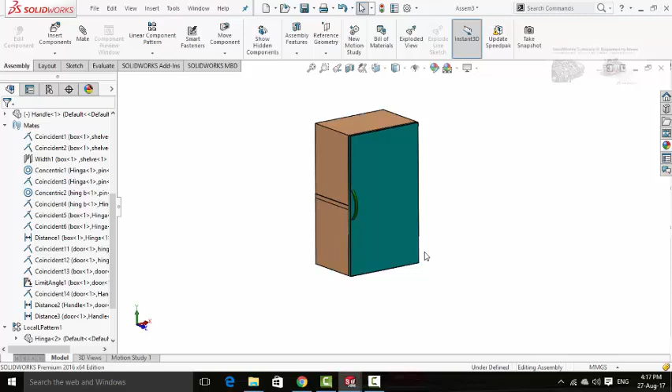Assalamualaikum friends, in this video I am going to show you how to create a box like this in SolidWorks by using sheet metal commands. So keep watching this video till end.

So let's start. Draw a sketch on front plane. Now select corner rectangle and start it from the origin. Define it 1 meter and 600 millimeters.

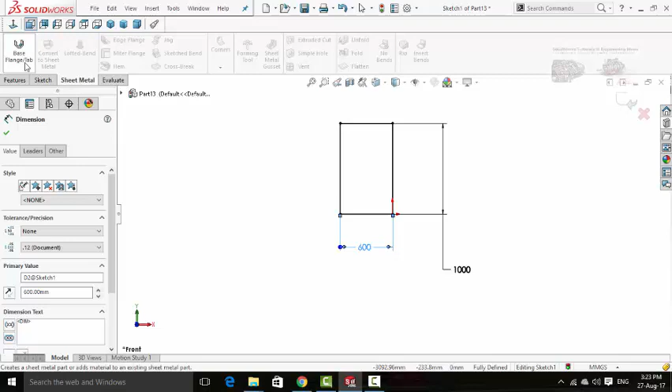Now in the sheet metal tab, select base flange command and extrude it up to 0.4 millimeters and keep the rest of the things as they are. Press OK button.

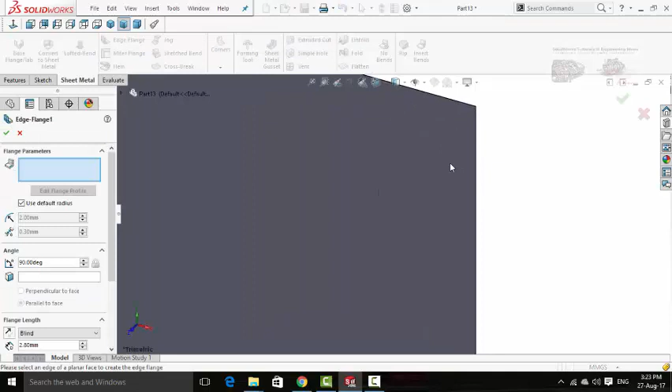Now click on edge flange command and select all these lines one by one, and carefully select the line on back side of the part. Extrude it on this direction.

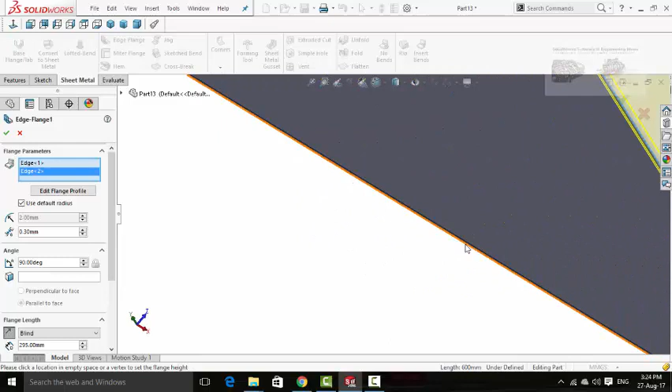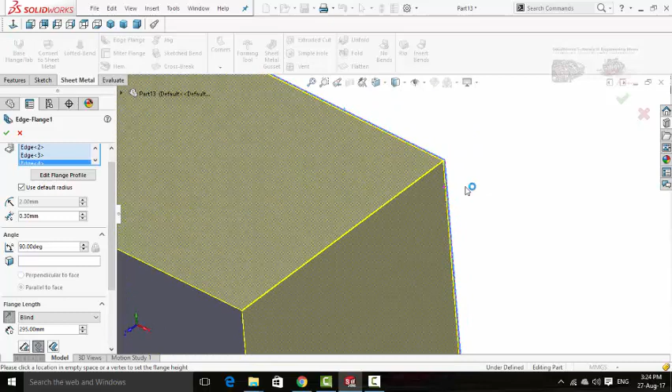Now scroll down from here. If you zoom in and see this distance which is mentioned here, this is the bend radius, here is the bent degree, and here is the extrusion distance, and we need to keep this extrusion distance 295 millimeters. So press OK button.

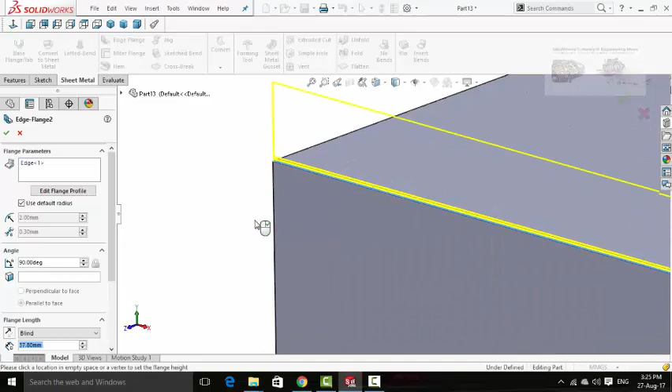Again select edge flange command. For this time we need to select these edges one by one. And extrude them on this direction.

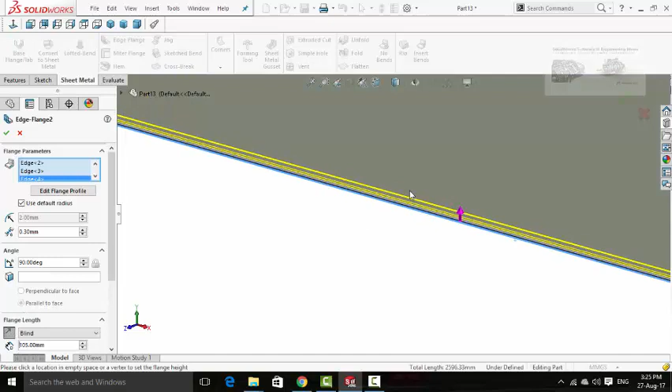30 millimeters is the distance, and press OK button. Now box is ready, so save it.

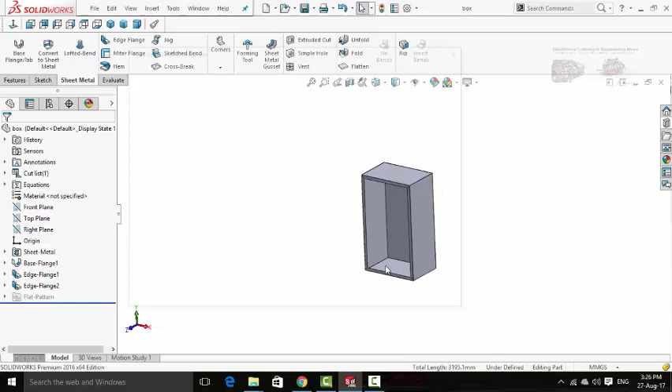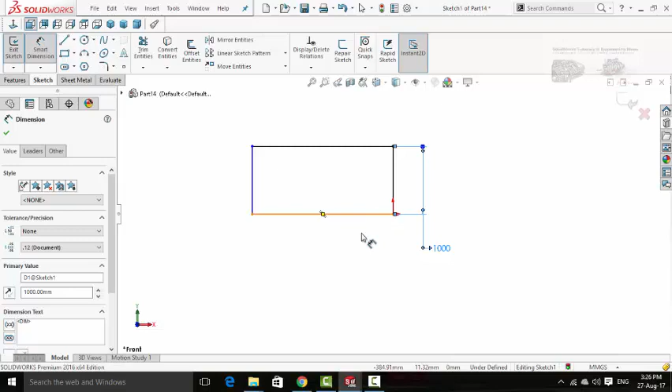Now create a door. So go to new part and sketch on front plane. Select corner rectangle and draw it from origin. Define it 1 meter and 600 millimeters.

Select base flange tab from sheet metal tab and press OK button.

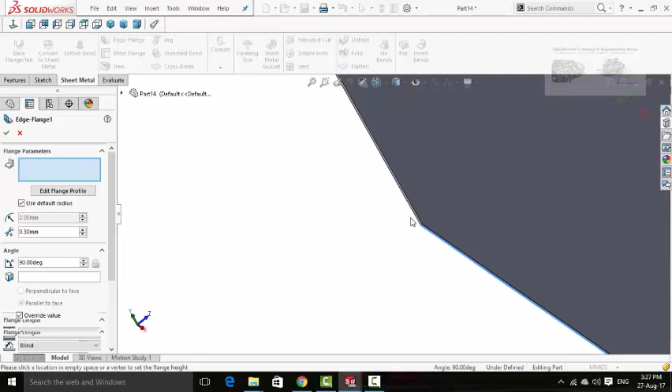Now use edge flange. Select all the corner lines one by one. Scroll down and extrusion distance should be 20 millimeters. Press OK button.

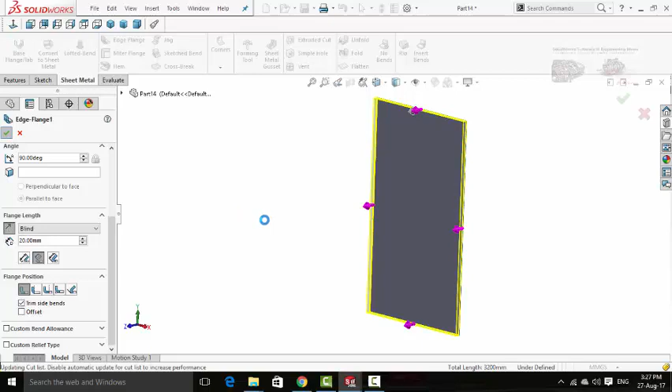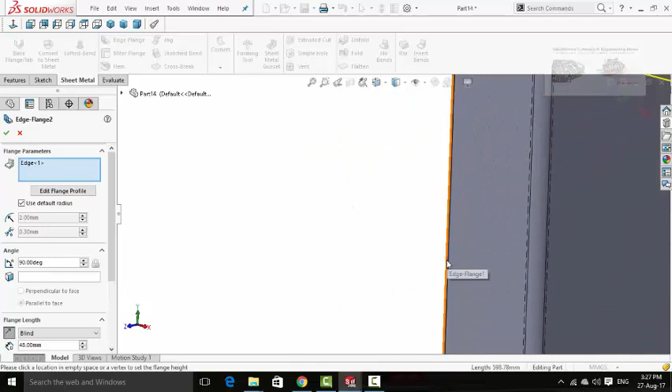Now once again select edge flange and select all these corner lines one by one again, on this direction. Scroll down and type the extrusion distance or length 30 mm. Press OK button.

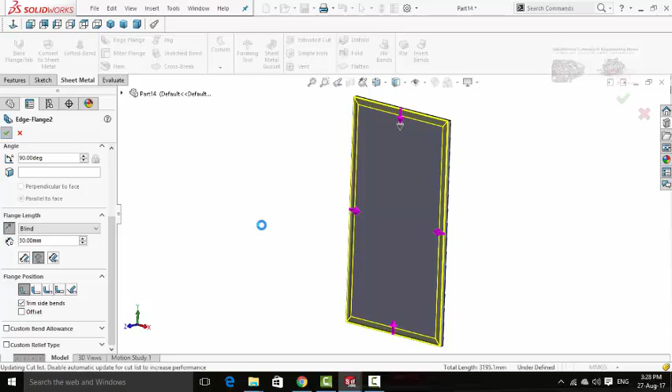Now door is ready, so save it. Door.

Now create a shelf. So for that, create new part. Sketch on front plane and draw a corner rectangle from origin. Define it 599.20 and 399.60.

Now again in the sheet metal, select base flange tab and press OK button.

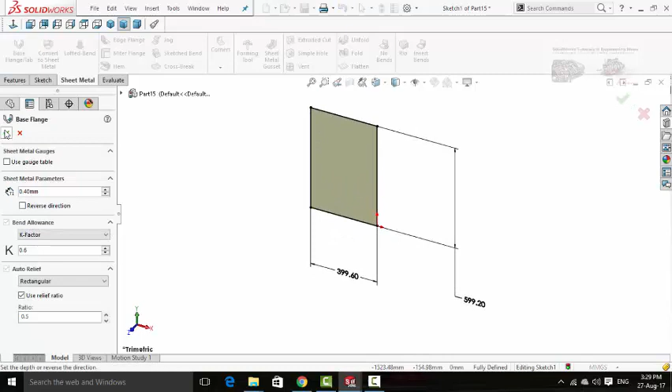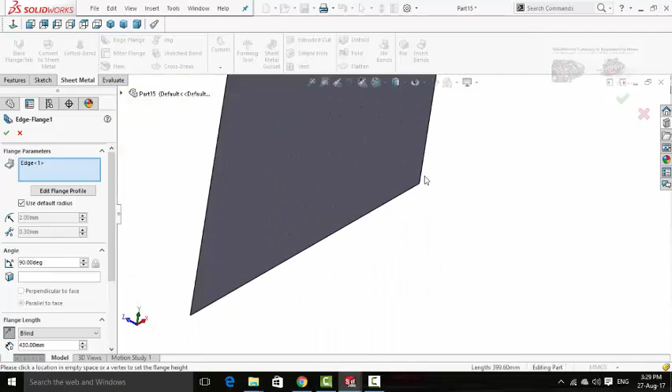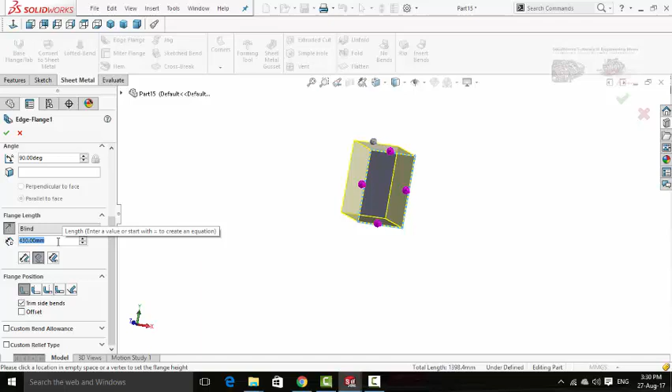Now select edge flange. And extrude it up to 30 mm. Press OK button.

Now you can save it.

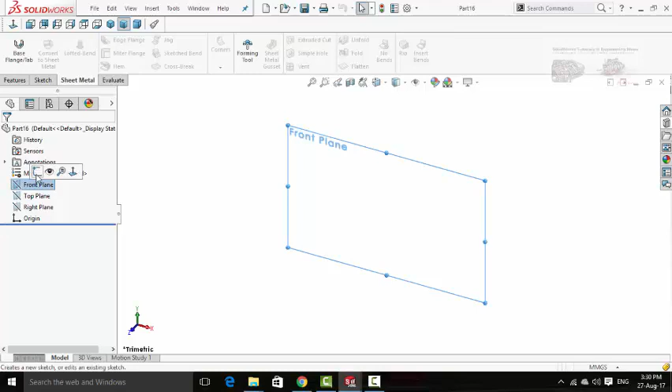Now another new part for hinge. Sketch on front plane and draw a rectangle from origin. Define it 30 mm and 70 mm. In the features tab, select Extruded Boss base command and extrude it up to 2 mm. Press OK button.

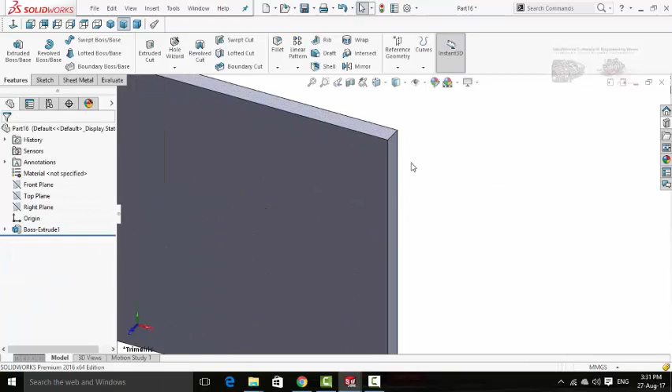Now sketch on this face. Make normal to by pressing Ctrl+8 key and select the perimeter circle. Draw it from this corner. Now select this point from here and draw or place it on this quadrant of the circle.

Press escape button and then press and hold Ctrl key. Select this corner and then this point. Make relation vertical. Now define it

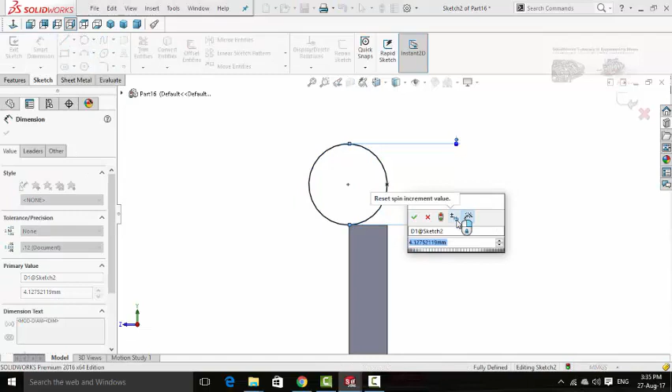3 mm. Now draw a circle inside this circle and define it 1.5 mm.

Zoom in and draw a line. Start it from this corner to this line.

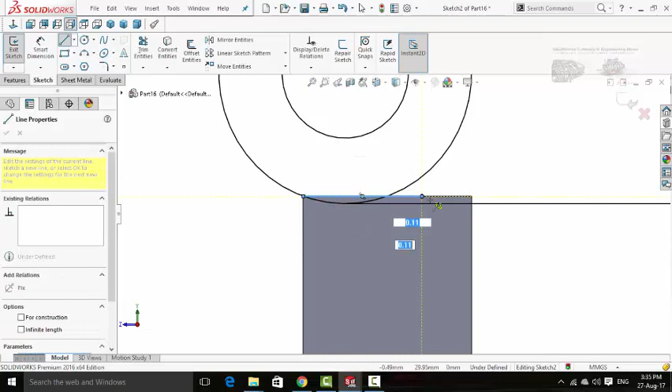Now select trim entities command and trim the two lines and circle. Now define this length for the line, which is 1 mm, so press OK button.

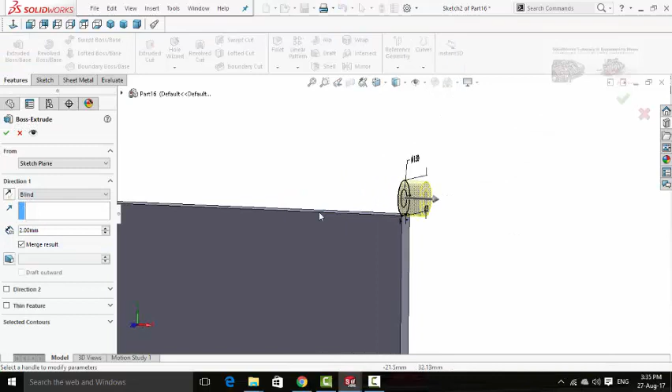In the features tab, select Extruded Boss command and extrude it up to 10 mm on reverse direction. Press OK button.

Now select this Boss Extrude 2 and click on linear pattern. First of all, it will ask you about the direction 1, so select this line as first direction.

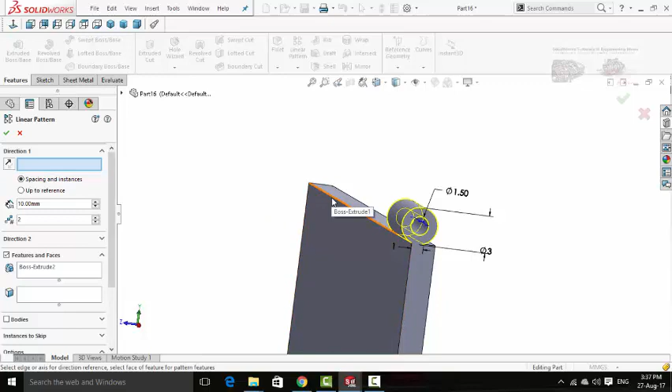Then it will ask you about the distance between the instances, which is 30 mm on the reverse direction, and the quantity is 3. Press OK button.

So it was the first part of hinge. Now create another new part for the second part of hinge. But before that you have to save this hinge part 1. So save it, hinge A.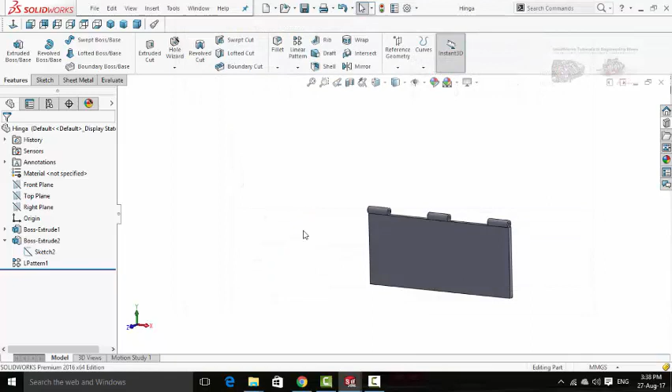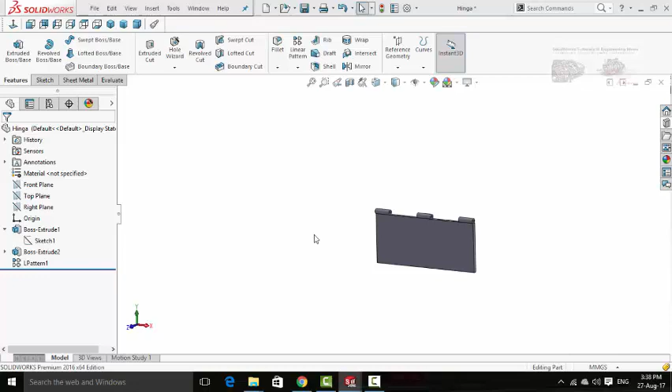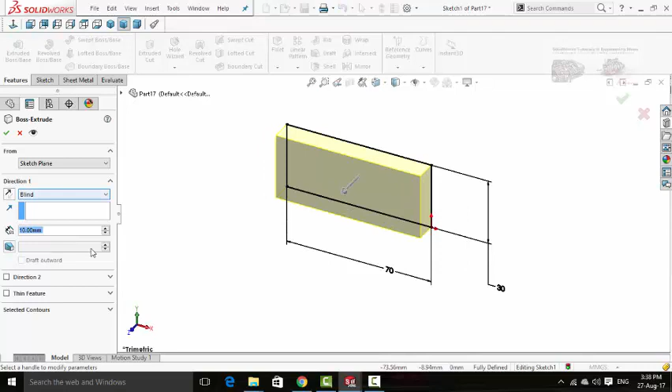Now click on this arrow and select the sketch, then edit it, select all the sketch and copy it. Now create a new part. So on the front plane create a sketch. Now paste that sketch of hinge A, select this corner and then the origin, make relation coincident. Now it is fully defined, so extrude it up to 2 millimeters. Press OK button.

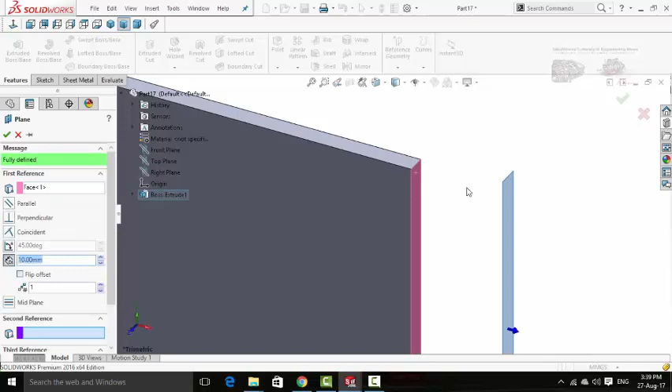Now click on reference geometry and select plane. Select this face as first reference and flip offset. The distance is 10 millimeters.

Press OK button. Now open the hinge part A. This time I want to copy the sketch for this part. For that, click on this arrow and click on the sketch, then edit it, select all the sketch and copy it. Save and exit from sketch.

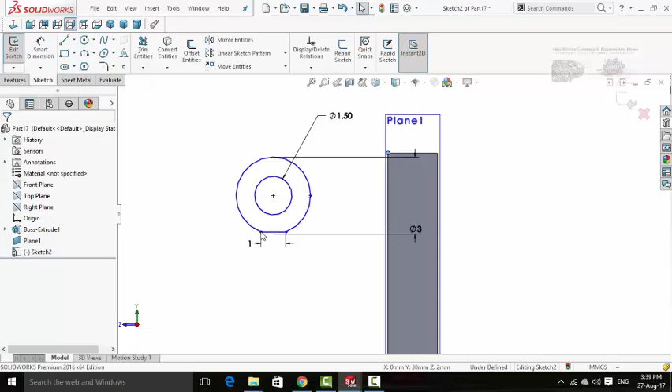Open the hinge part B and sketch on this new plane. Make normal to and paste the sketch. Now select this point and the corner and make relation coincident. Another step is to select this line and then this line, make relation collinear. Now our sketch is fully defined.

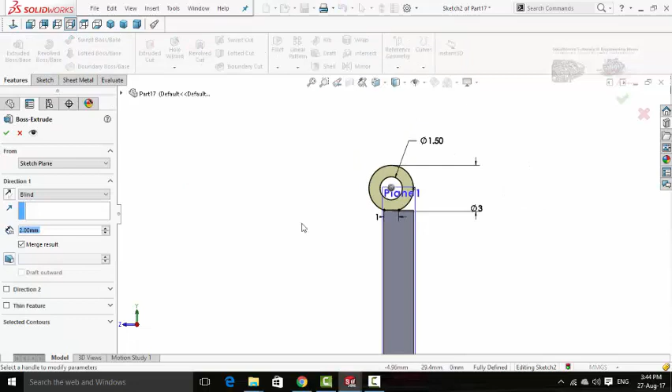So in the features tab, select Extruded Boss base command and extrude it up to 2 millimeters and on the reverse direction. Press OK button.

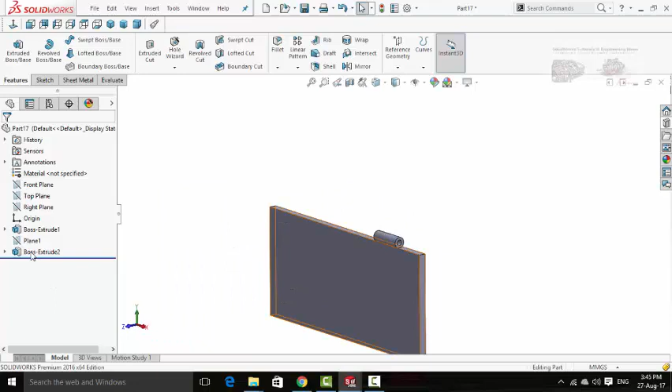Now zoom in and hide this plane. Now click on Boss Extrude 2 and then select linear pattern, the direction 1, select this line, quantity which is 2

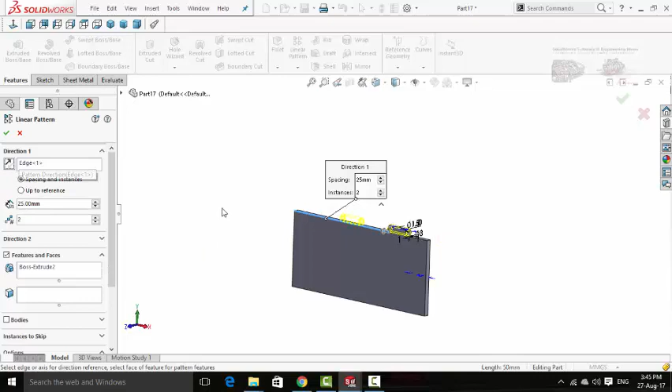and the distance should be 25 millimeters on the reverse direction. Instead of 25 millimeters, this time we need to add 40 millimeters distance. Press OK button.

Now we need to create a pin for these holes. So first of all, save this hinge as hinge part B, hinge B.

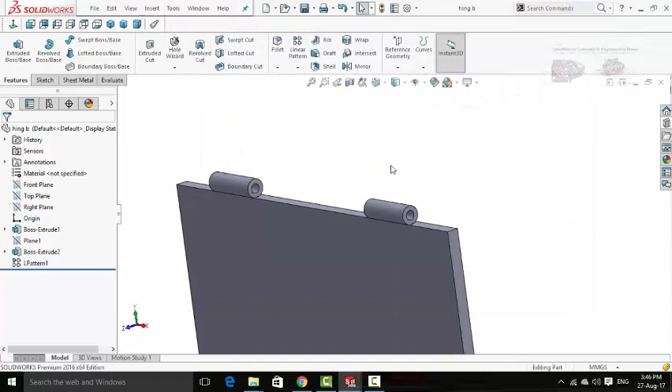Now new part, sketch on front plane and draw a circle, define it 1.5 millimeter and extrude it 70 millimeters.

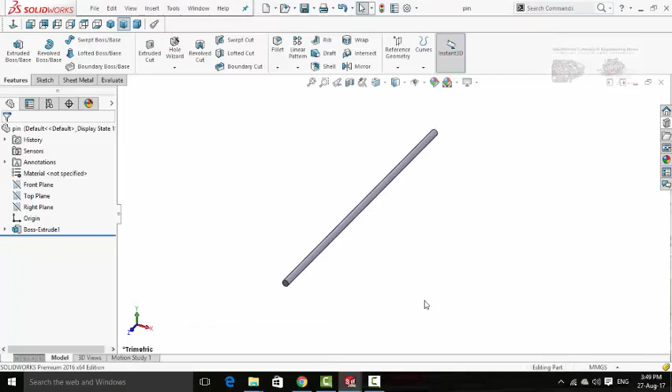Now create a new assembly and import all these parts in the assembly one by one. Select all the parts and drop them.

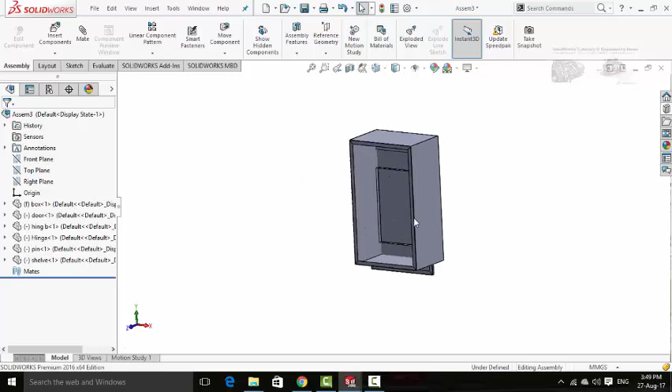Drag it. As you can see, it can't be moved, so it is fixed. Right click on it and select float. Now move it. Again right click on it and fix it. Now drag the shelf.

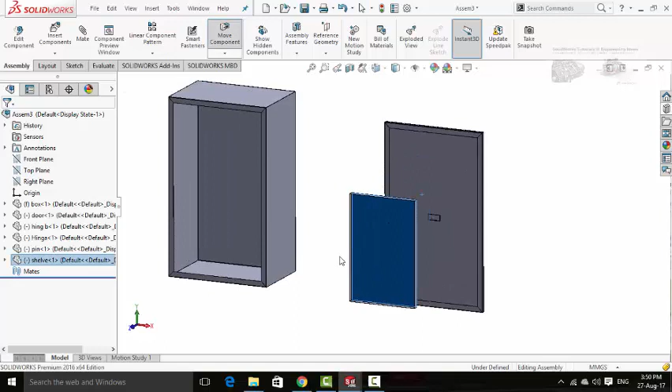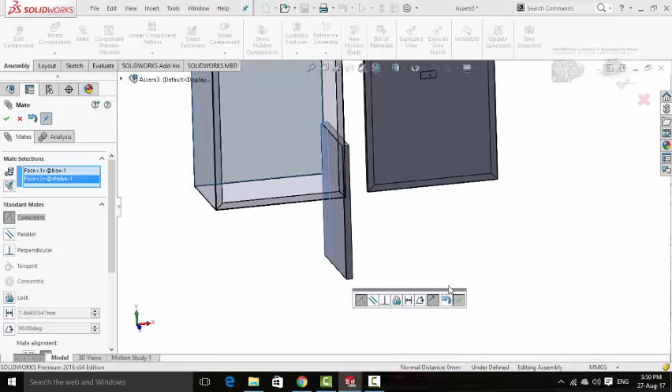Click on this face and select mate. Now click on this face. Press OK button. Now click on this face and on this face. Press OK button.

Now I want to set it in the middle of this box. For that, scroll down from here. Click on Advanced Mate and from here select Width. Now click on this face and on this face. Now on this face and on this face. Press OK button.

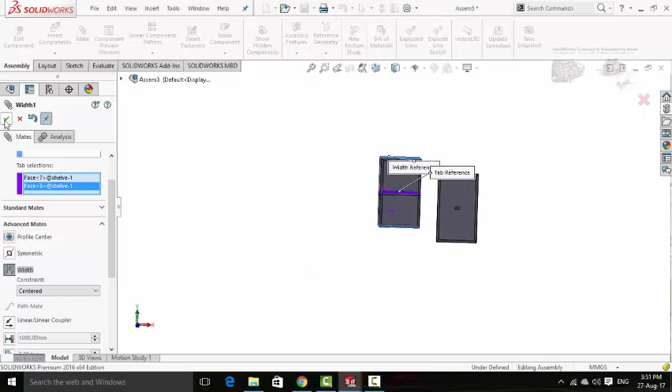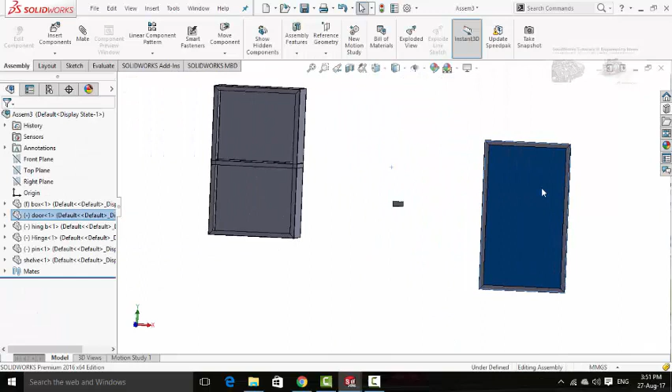Now assemble hinge. Press OK button and drag the door. Zoom in. Now click on this cylindrical face of this pin and select mate. Now click on the cylindrical bore of this hole and do not lock rotation. Press OK button.

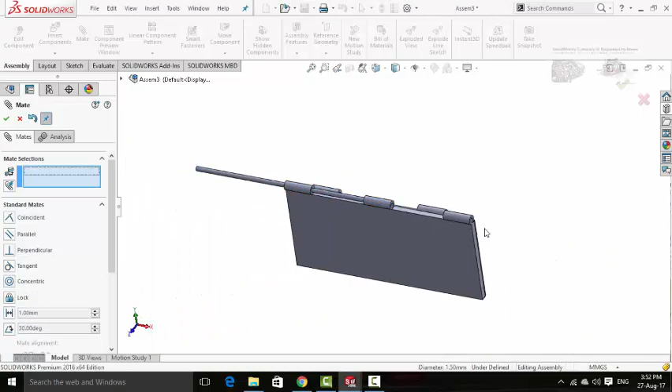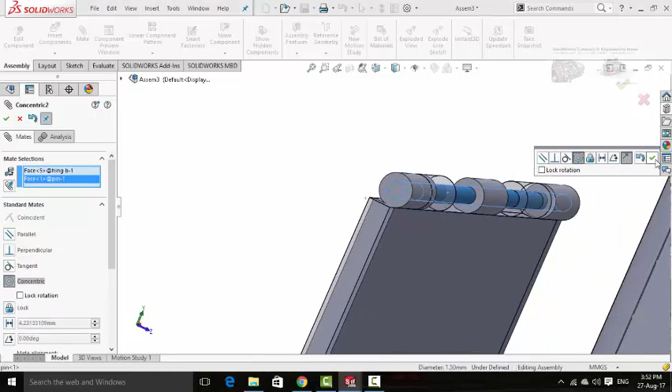Now click on this face and on this face of pin. Press OK button. Again click on the cylindrical face of this hole and then the cylindrical face of pin. Do not lock rotation. Press OK button.

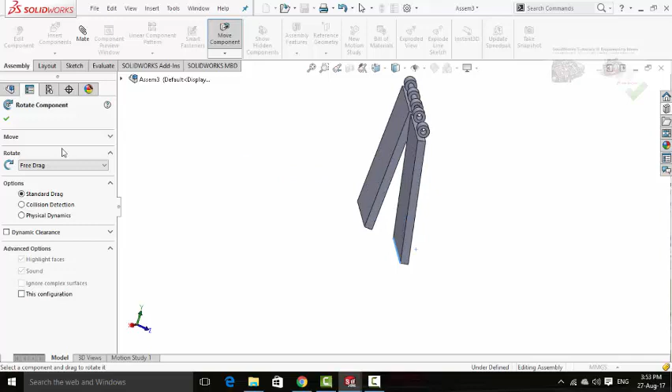Now drag the hinge part A and make some distance between both of these parts. After that, press OK button and from here select rotate. Now press OK button.

Now click on this face and select mate, and then select this face. Hinge A, press OK button.

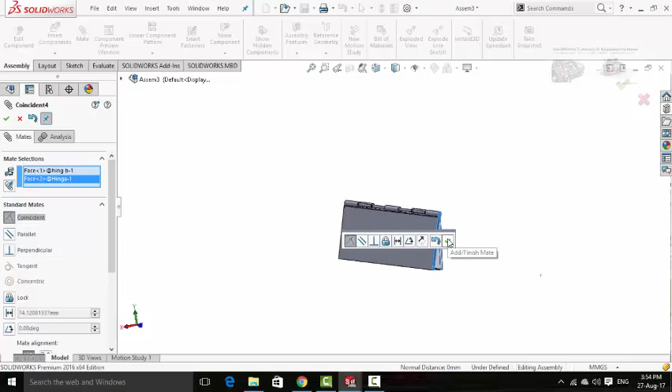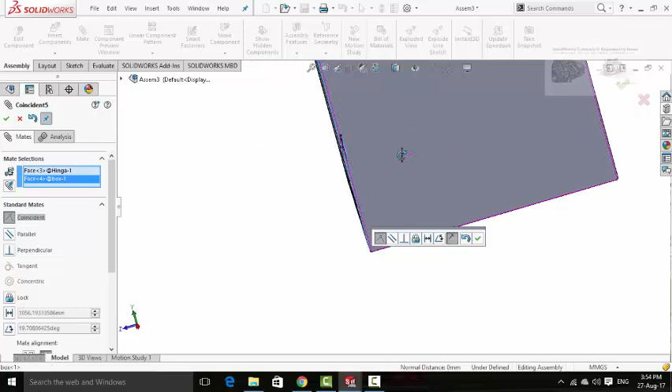Select this face and this face. Press OK button. Now select this face and this face. Reverse the direction. Press OK button.

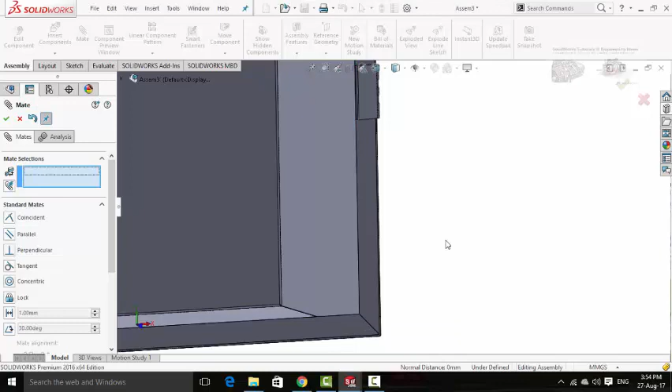Now click on this face and this face of hinge. Make some distance, 200 mm. Press OK button. Now press OK button again.

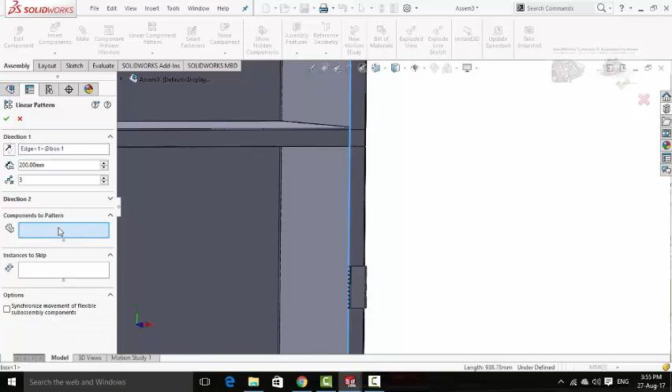Now click on linear component pattern command and for direction 1, click on this line. Quantity is 3 and the distance should be 200 millimeter. We don't need direction 2, and then click on this box for components to pattern.

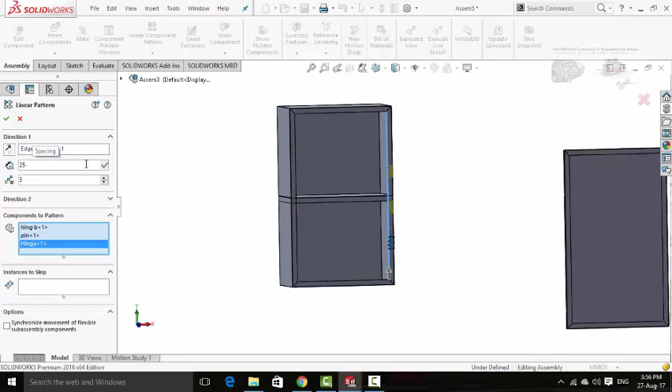Now zoom in and select all parts of hinge one by one, the pin and hinge part A. From here increase the distance to 150 millimeters. Now press OK button.

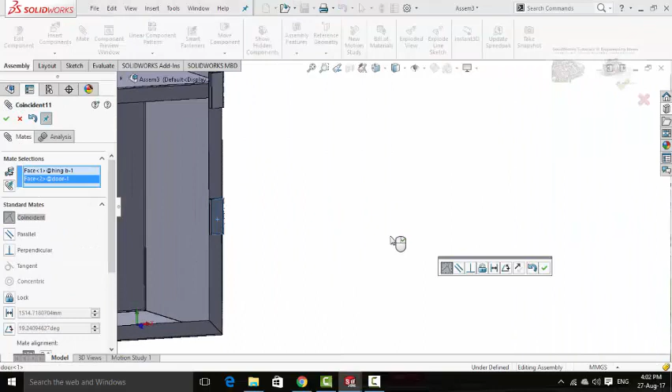Now it's time to assemble the door with the hinge. So for that, click on this face of hinge and select mate. Now click on this face. Click on reverse direction to flip mate alignment and press OK button.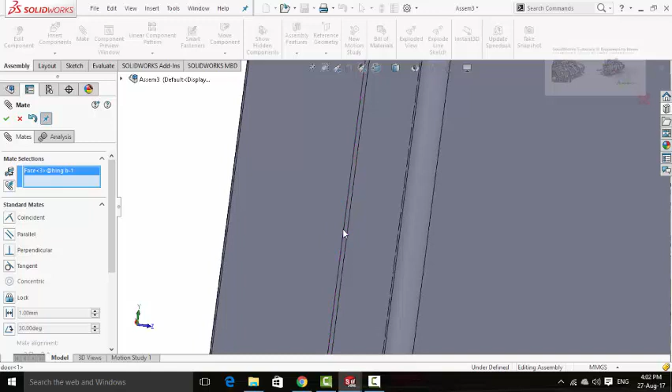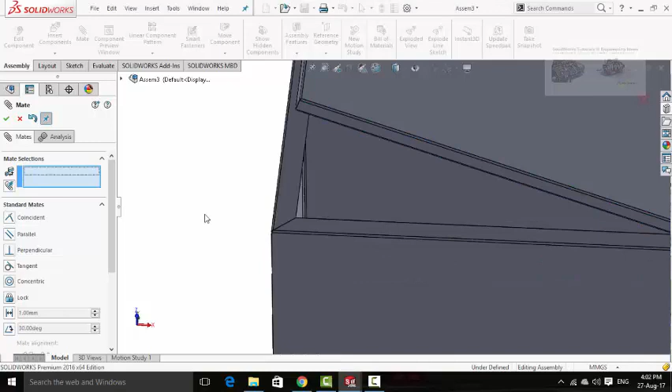Now click on this face of hinge and then on this face of door. Press OK button. Now click on this face of box and then on this face of door, press OK button. Again press OK button and check whether the door is assembled perfectly or not.

So it is assembled now, but there is a problem, it can't stop on this position. To lock the rotation for the door, now to stop the rotation for the door, again click on mate and then scroll down in advanced mate.

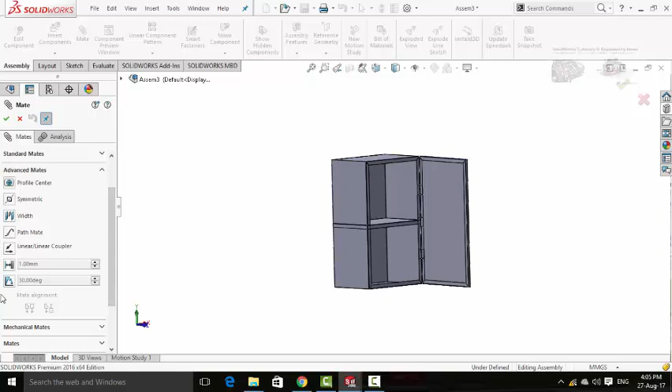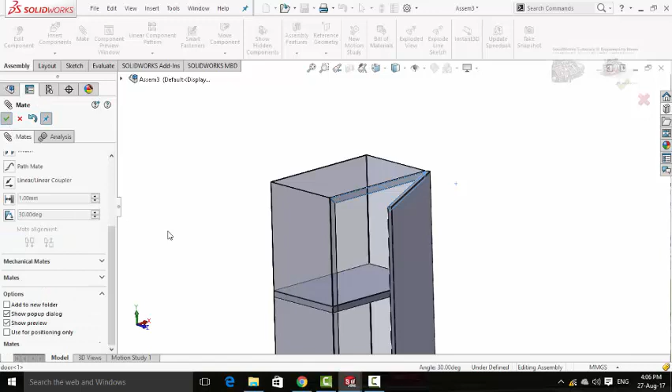Click on angle, select this face and this face. Maximum angle should be 90 degree and minimum angle should be 0 degree. Press OK button. Again press OK button. Now check. So it can't move from 90 degree and from this position it is stopped at the box.

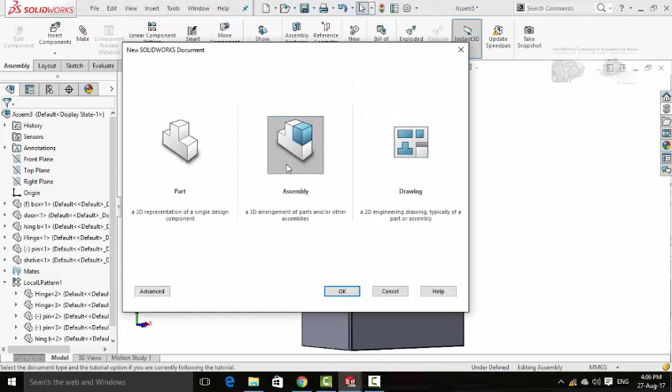One more thing which is left is the handle. So create a new part. Sketch on front plane. Draw an arc.

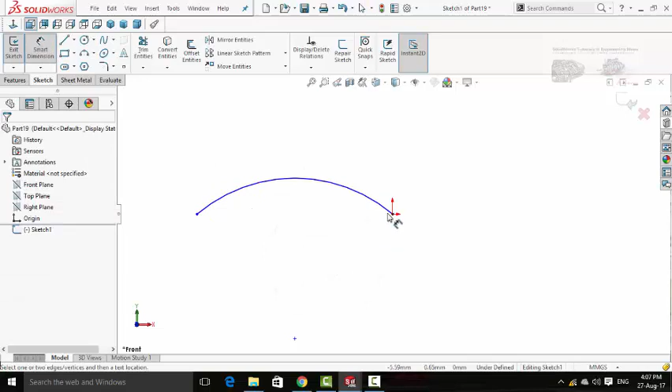Select both of these points and make relation horizontal. Now define them, 200 millimeters, and define this distance from origin 40 millimeter. Again draw arc, but before the arc draw a line like this, another line on this side.

Now select both of these lines and make relation equal. Define them 5 millimeters. Now draw arc like this and define this distance 8 millimeters.

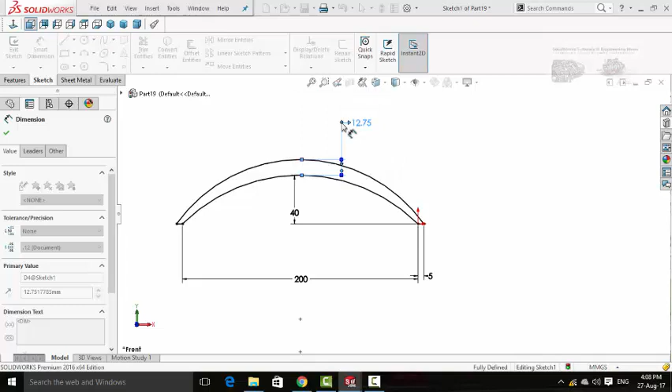Press OK button, and in the Features tab select Extruded Boss base command and extrude it up to 20 millimeters. Press OK button. Now save it as handle.

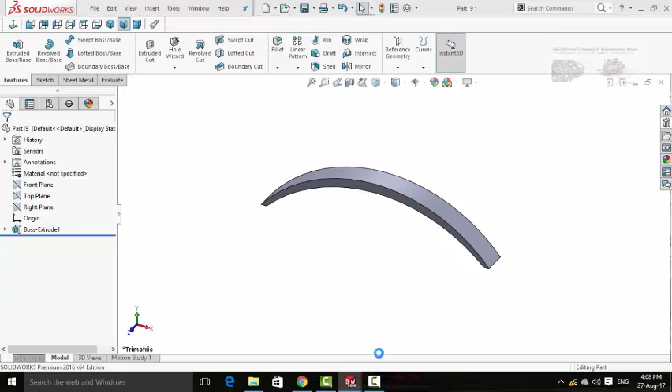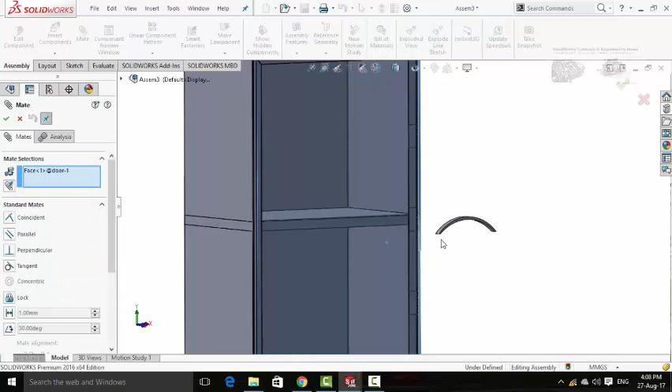In the assembly, import it, insert component and search for handle. Select this face and mate. Now select this face of handle. Press OK button. Now select this face

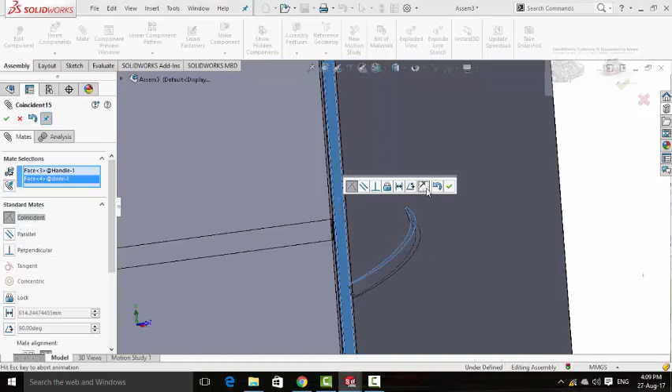and then this face of door in the reverse direction. Now make some distance, 30 millimeters. Press OK button.

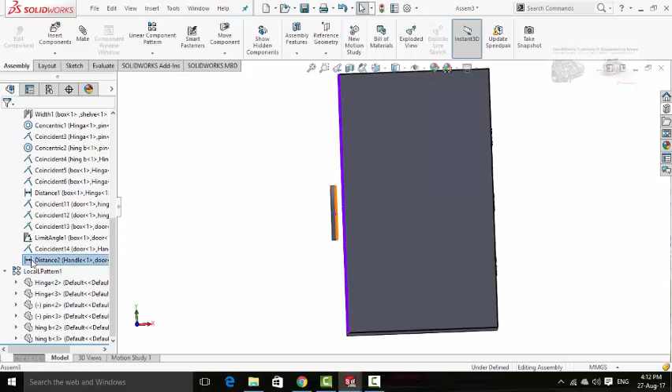I forgot to reverse the direction for this distance, so press OK button and scroll down and drop down this mates option, and at the end select this distance mate and edit feature. Now check this box, flip dimension. Press OK button.

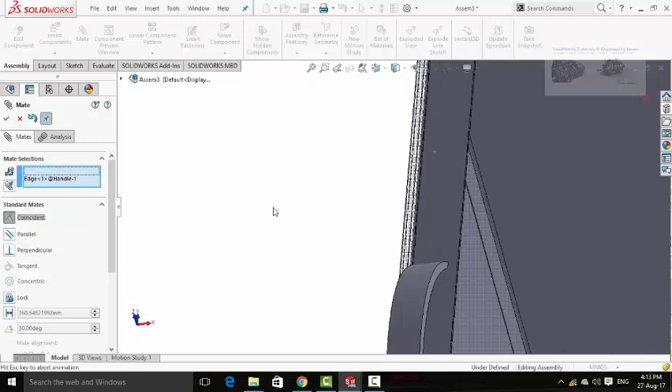Now click on this face of door and then this edge of handle. Make distance 400 millimeters. Press OK button. Again press OK button.

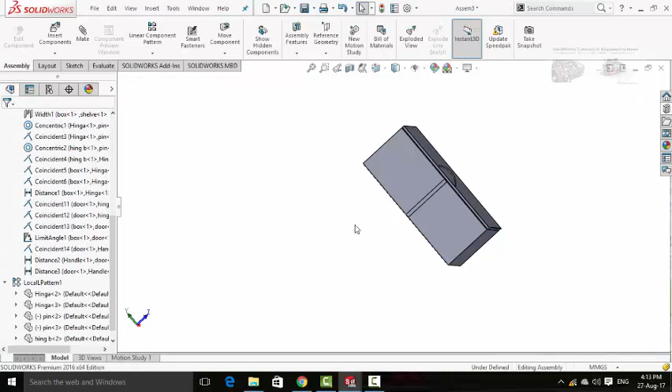Now our box is completely ready. Let's open it.